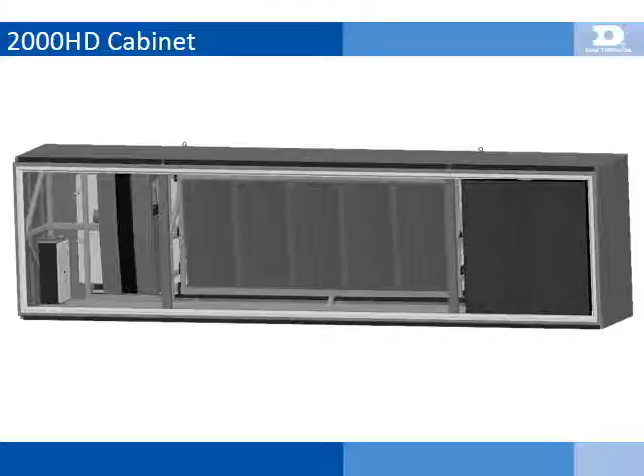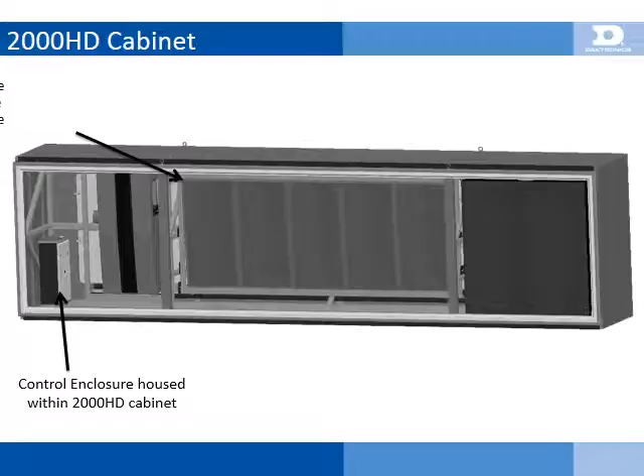The Sportsound 2000 HD speaker cabinet is a high-power, self-contained point source speaker system which measures 22 feet wide, 6 feet high, and 3.5 feet deep. Power and signal field connections are housed within the onboard control enclosure located just inside the rear access door. The high-mid frequency section has anywhere from 0 to 15 degrees of vertical adjustment in 3-degree increments. During installation, the high-mid frequency section must be adjusted for optimal venue coverage and then locked into place.

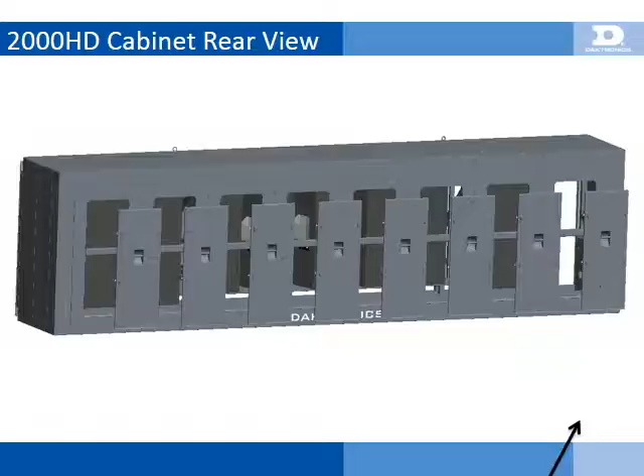The rear view of the speaker cabinet shows the access doors for power signal enclosure connections, service of amplifiers, as well as service of the high and mid-frequency speaker drivers. Access to adjustment of the high-mid frequency section is gained through the rear access doors, and rotating in the high-mid requires only a 3/4 inch wrench. High-mid frequency section rotation is a crucial part of setting up a sound system and must be field adjusted during installation to properly cover the venue, using drawing 102-3805.

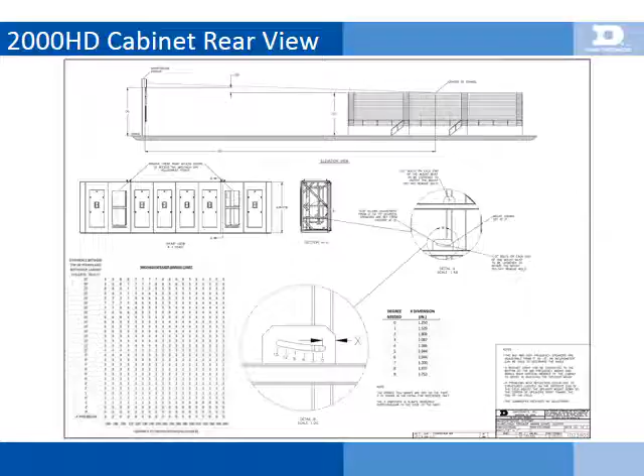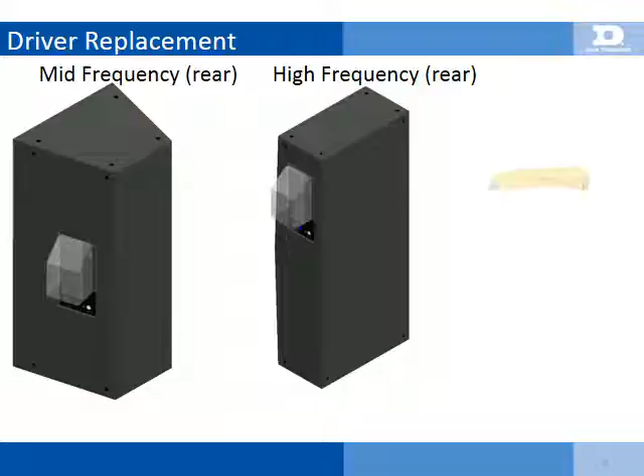Service of high and mid-frequency speaker drivers is provided through the rear access doors of the 2000 HD cabinet. The drivers are easily accessed through removable rear access panels on each speaker. These panels are weather sealed with silicone and must be cut with a razor along the perimeter. They're fastened with 5/32 inch hex machine screws and can be removed with an Allen wrench or a hex bit mounted on a drill driver. Replacement of the mid-frequency driver requires a 3/16 inch hex bit or Allen wrench for the 4 machine screws per driver.

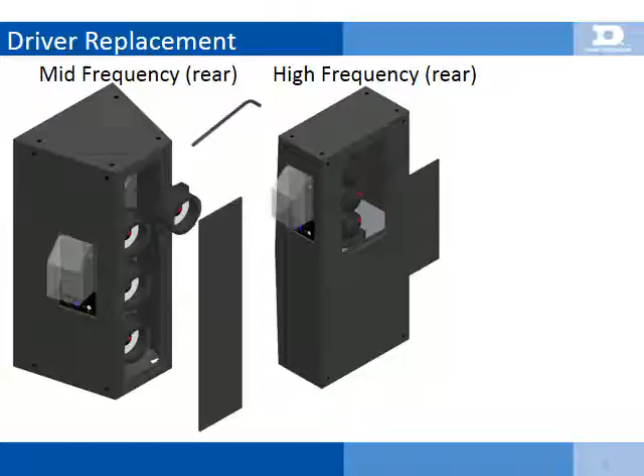High-frequency drivers are mounted with 4 threaded studs facing forward, fastened with 10mm nuts. A ratcheting wrench will help make the job much easier. After replacing the driver, the panel must be replaced and the joint must be resealed with silicone.

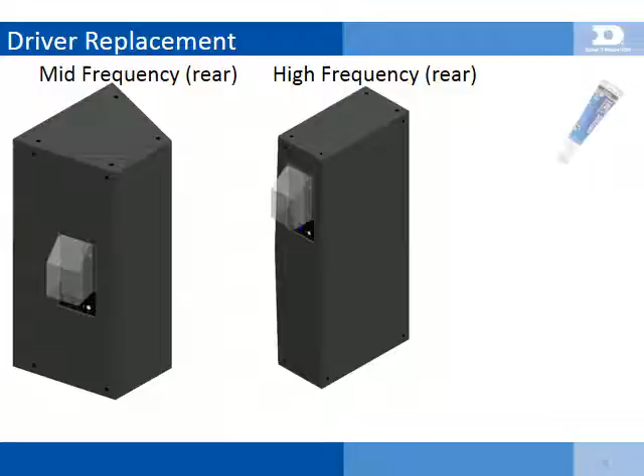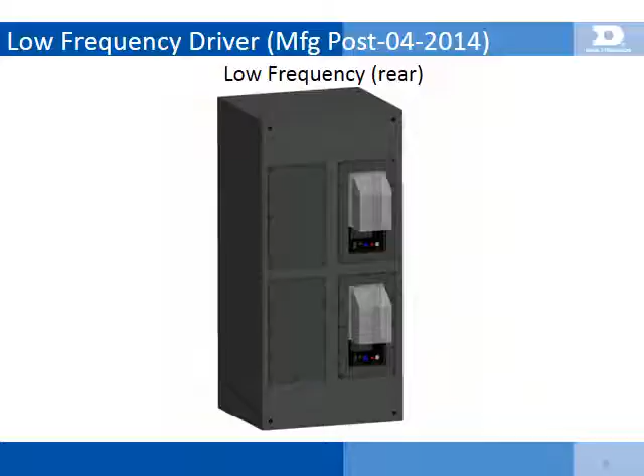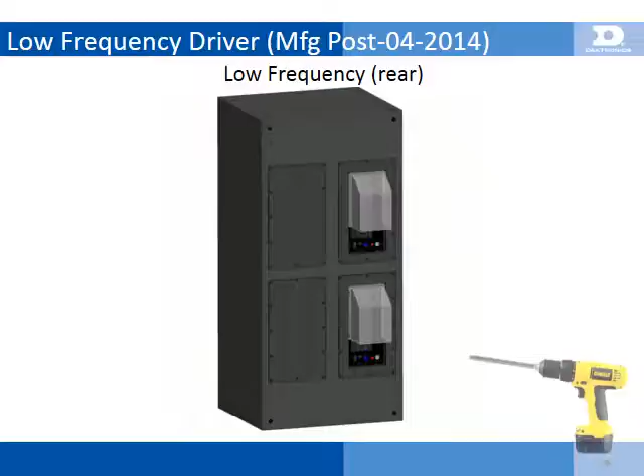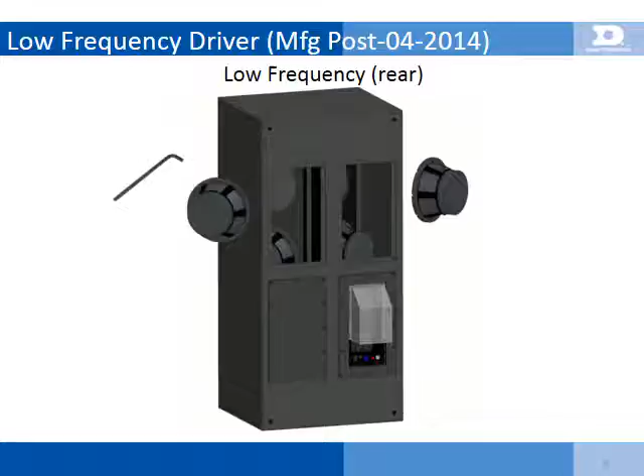Sportsound 2000 HD sound systems manufactured after April of 2014 allow service of the low-frequency drivers from the rear access doors of the 2000 HD cabinet. The drivers are easily accessed through removable rear access panels on each speaker. These panels are weather sealed with silicone and must be cut with a razor along the perimeter. They are fastened with 5/32 inch hex machine screws and can be removed with an Allen wrench or a hex bit mounted on the drill driver. Replacing the low-frequency driver requires removing the 8 machine screws with a 3/16 inch hex key or Allen wrench. After replacing the driver, the panel must be replaced and the joint must be resealed with silicone.

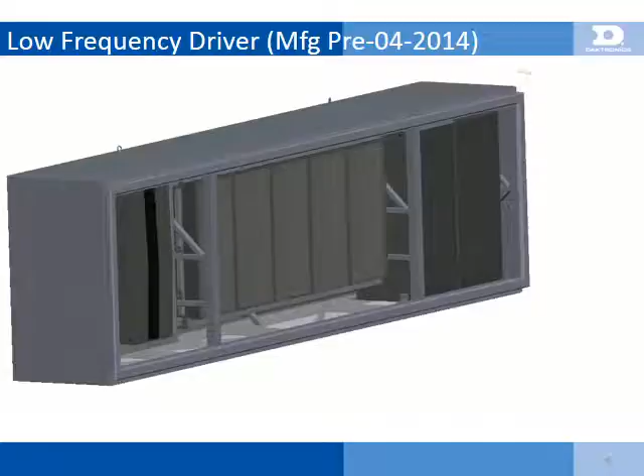Sportsound 2000 HD sound systems manufactured prior to April of 2014 allow service of the low-frequency drivers from the front. Access is achieved by removing the mesh frame of the 2000 HD cabinet. This requires a 9/16 inch socket to access the bolts that fasten the frame. The low-frequency speaker grill must also be removed. This grill is weather sealed with silicone, so it must first be cut with a razor along the perimeter and unscrewed using a No. 2 Phillips screwdriver.

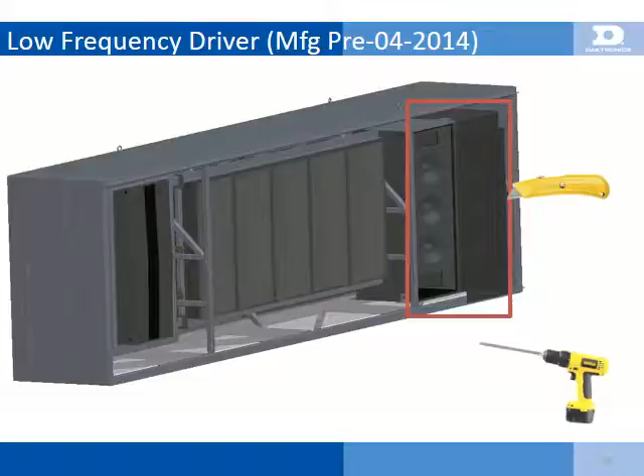Replacing the low-frequency driver requires removing the 8 machine screws with a 3/16 inch hex bit or Allen wrench. Using a hex bit mounted on a cordless drill driver will make this much easier. Replace the speaker grill and apply silicone to reseal the perimeter. Then replace the 2000 HD speaker cabinet mesh.

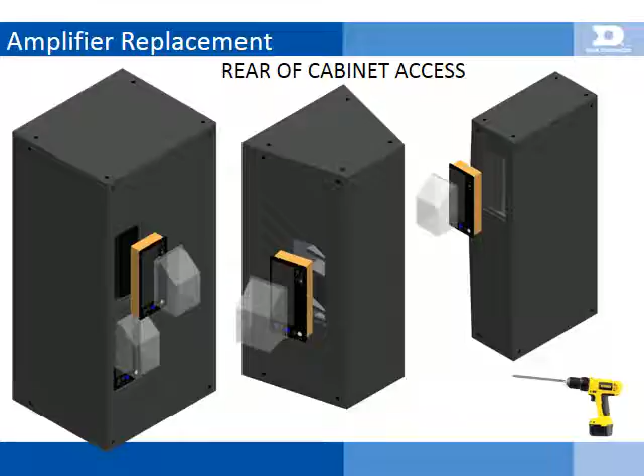Amplifier service is achieved through the rear access doors of the 2000 HD cabinet. Amplifiers are mounted using No. 2 Phillips screws and are quickly removed with a cordless drill driver. All amplifier jacks are keyed, so there is only one correct connection per cable.

On the 2000 HD, the mid-frequency cabinets are close together. Use a stubby number 2 Phillips screwdriver for the close quarters on the mid-frequency cabinets.

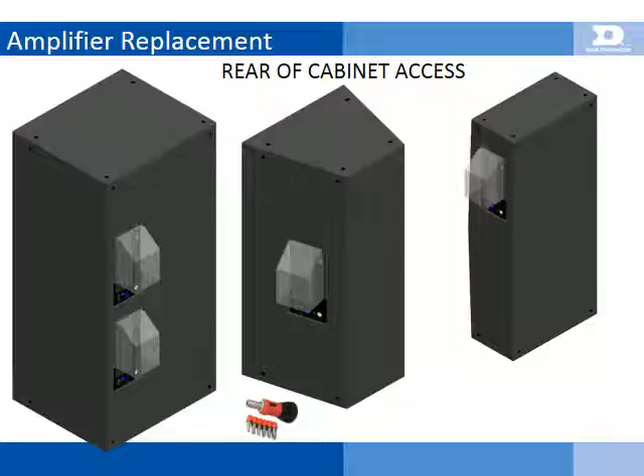Each speaker cabinet, high, mid, and low, is considered a self-powered speaker, meaning the speaker has a built-in amplifier module. In the 1500 and 2000 HD, most amplifiers are 2-channel modules. The amplifier's power is provided to the speakers via connection with a white 6-pin Molex connector with a pin out on each amplifier as follows: Channel 1, lower right 2 positions, and Channel 2, the left 2 positions.

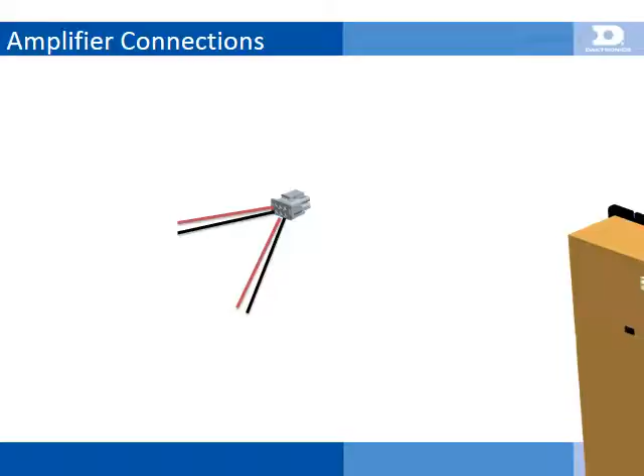Schematic drawing 1082599 contains all wiring information for the 2000 HD.

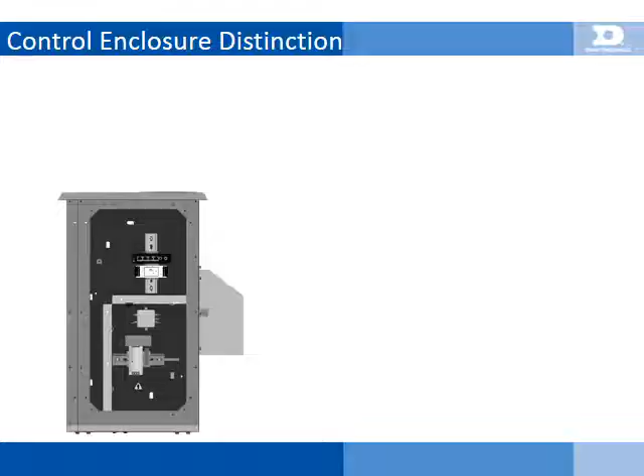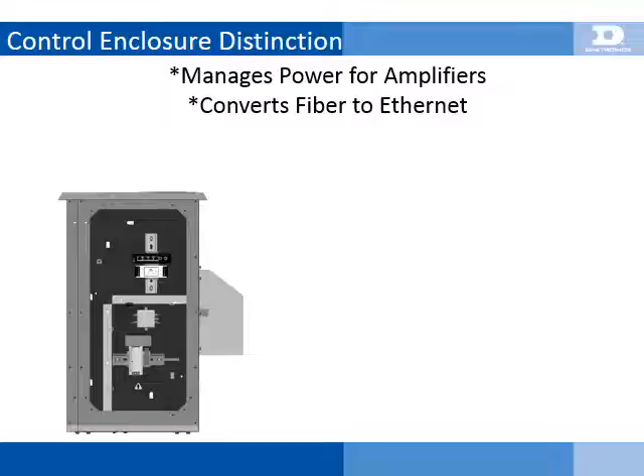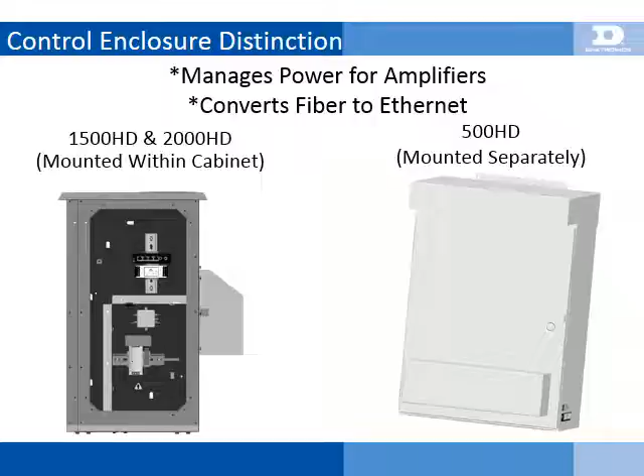The control enclosure is an essential piece in all Daktronics standard audio systems, as this is the weather protective housing for all power and signal connections, as well as a fiber optic Ethernet switch. The control enclosure in the 1500 and 2000 HD systems slightly differs from that of the 500 HD sound system. First, the control enclosure in the 2000 HD is smaller in size, so it is housed within the cabinet itself. Second, the 2000 HD control enclosure contains only power and signal connection points, whereas the 500 HD control enclosure contains amplifiers as well.

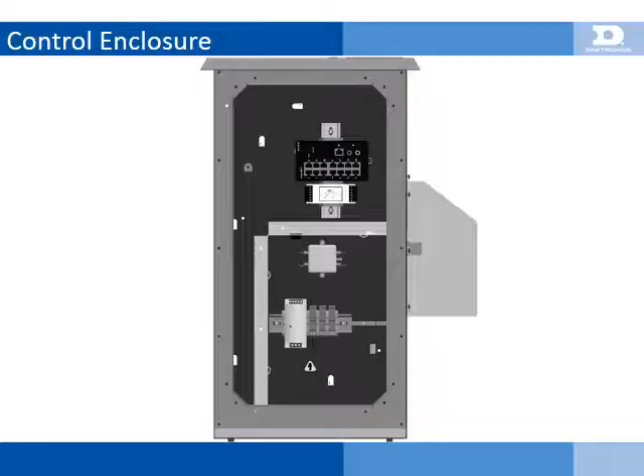The control enclosure is accessed via the rear access door located on the far right as viewed from the rear of the speaker cabinet. Accessing components and connections within the enclosure is as easy as a quarter turn of both latches, done with either a flathead screwdriver or coin. The control enclosure is partitioned for low voltage signal components, the fiber conversion network switch, and audio isolation transformer, with a separated compartment for high voltage connections and power supply.